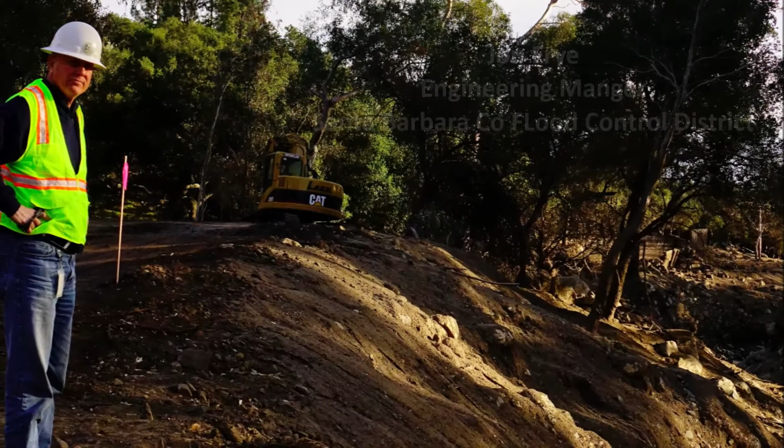Very good. So we've done a lot of these Zoom meetings, and every time I have to share my screen, it's kind of like a roller coaster ride, the fear and the trepidation, and is it going to work? And I have big thumbs. So everybody hold your breath. Well, you saw what happened to me. Oh, I think I've actually got this. Can you see it? Yes, absolutely. Okay, now I'm going to go to full screen. Okay, good.

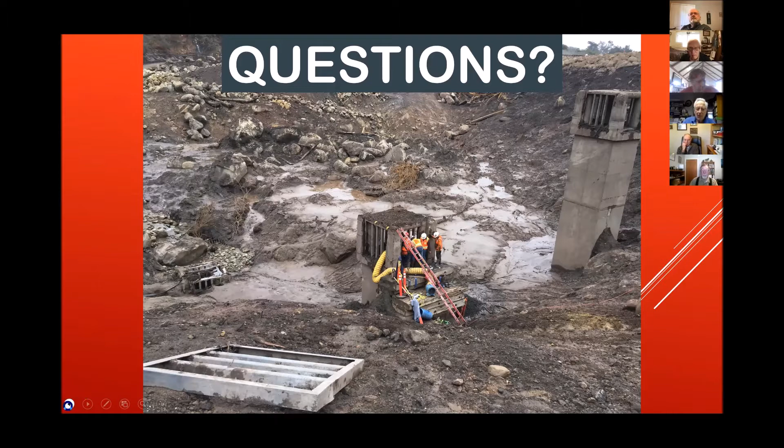So I see that I started off with the very last slide, and I'm going to do a really quick backtrack here. So here we are. I'm up front now, and again, thanks for inviting us. Let me get back to the full screen.

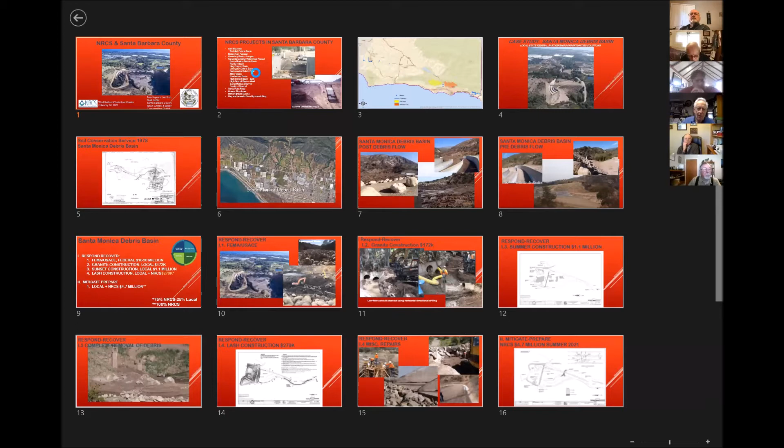Okay, so Bill, you had suggested you wanted us to go over just very briefly an inventory, if you will, of past SCS or NRCS projects. And right when you said that, a couple thoughts came to my mind. First of all, there are a lot of projects that we have partnered on over the decades, long even before I got here. But number two, it was the nudge that I needed, because it's actually been something in the back of my mind that I've wanted our mapping people to put together, a graphic inventory, if you will, because at Santa Barbara County Flood Control in the next couple of years, there's going to be a real turnover in senior level type people. And one thing we want to do is pass this institutional knowledge along. People are going to forget unless we make a conscious effort to take steps in that direction.

So this is a very... didn't have a whole lot of time to put this together, but this is a list of projects that a couple of us just off the top of our head put together. Goes back to the 70s for sure. And in fact, before I forget, so this Guerra Structures, that picture in 1975, that's original construction. Now in 1998, we had a big storm come through. Those structures suffered significant damage. NRCS came to town with an EWP project, repaired the structures.

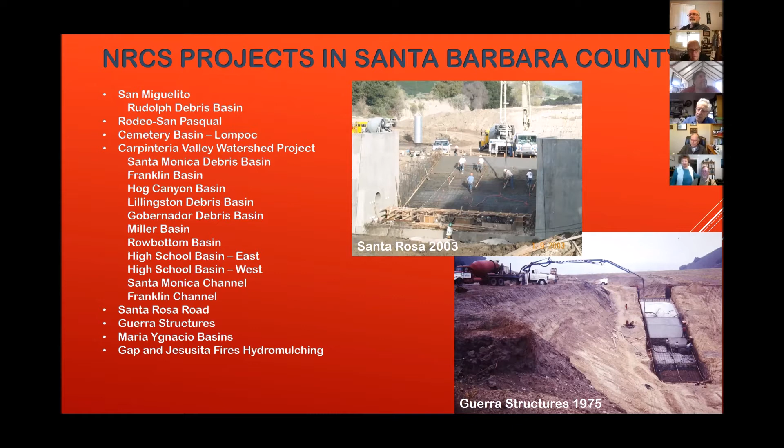Wow. A hydromulching effort, which itself is maybe worth a presentation all of its own. So a lot of history, a lot of strong work.

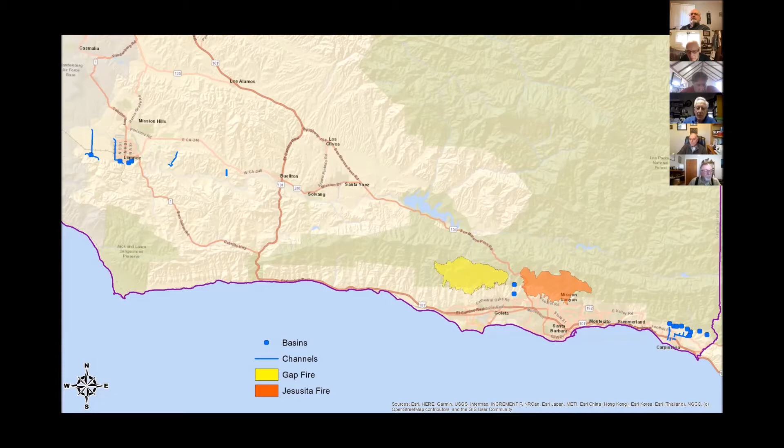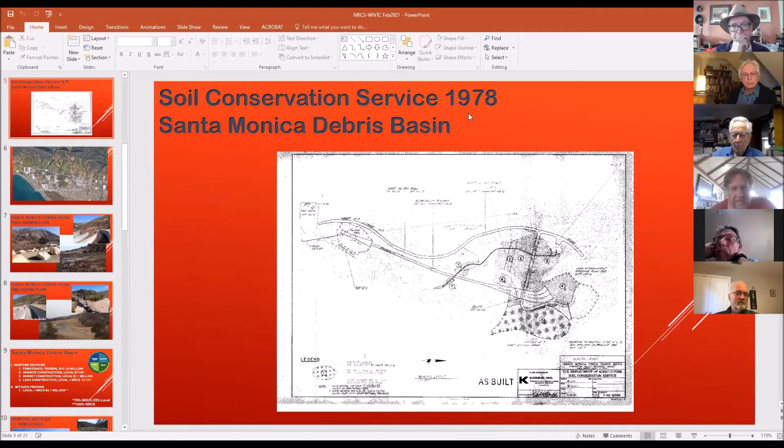So this picture here is just a slide of the record drawings. The basin, the dam embankment. This is the emergency spillway, which runs downhill, and then there's a plunge pool at the bottom of the emergency spillway. And this was all completed in the late 70s. And let me see here.

So the Santa Monica debris basin is located right here. It's actually part of the bigger Carpinteria Valley watershed project, which started in the 70s and wasn't really finished until the early 80s. So it was about 10 years from start to finish. The Santa Monica debris basin is really the crown jewel of that project, but it included several channels through the urbanized area also.

So for those of you who are not too familiar with what happened here in Santa Barbara County, about a month preceding that, we had the Thomas Fire, which at the time was the largest fire in California history. The Thomas Fire burned mostly in Ventura County, but it also burned a lot of the front country in Santa Barbara County. And the burn was pretty severe.

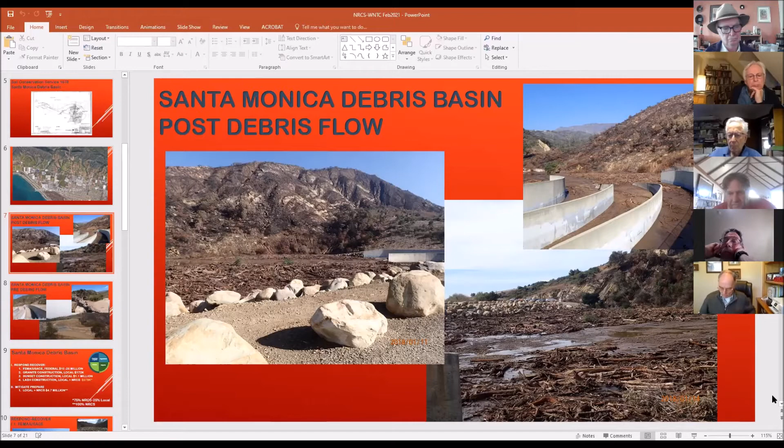But when we got out there on January 9th or 11th, Tower C was completely buried. That's because debris backed up from the emergency spillway and projected upwards at about 1.5%. So the projection of the debris buried all these towers. So it was a huge mess, but it worked. It worked. Yeah, you did the job.

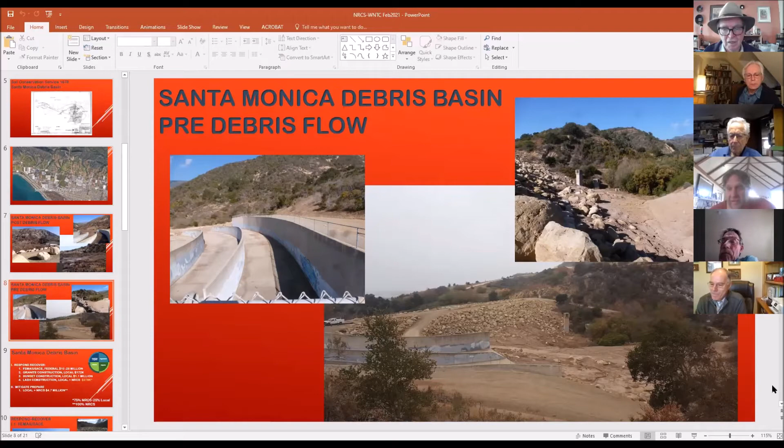So John put some slides here describing what the response entailed. For the initial response, we really relied on FEMA and the Corps to help us clean out this debris basin. John estimated here $10 to $20 million. I think the actual cost just to clean out this single debris basin was closer to 15 to $20 million.

I don't remember the exact volumes off the top of my head, but I want to say it was well over 100,000 cubic yards of material. There's no local disposal sites. It all had to be hauled to Santa Paula and to Buellton, maybe a 50 mile one-way trip. So the cost to clean out the basin was huge. In addition to the debris, we had several other cleanup efforts. I think they're detailed in further slides, so I'll wait for those.

But coming out of the project, the basin worked fantastically well, but there were some shortcomings as far as maintenance and operations, lessons learned. So we developed an operational improvements project. We've worked closely with the NRCS; Bill Ward helped us out with this also. We have now partnered with the NRCS on a $4.7 million operational improvement project for the basin. I'll talk a little bit about what that work entails and some of the shortcomings we're trying to improve.

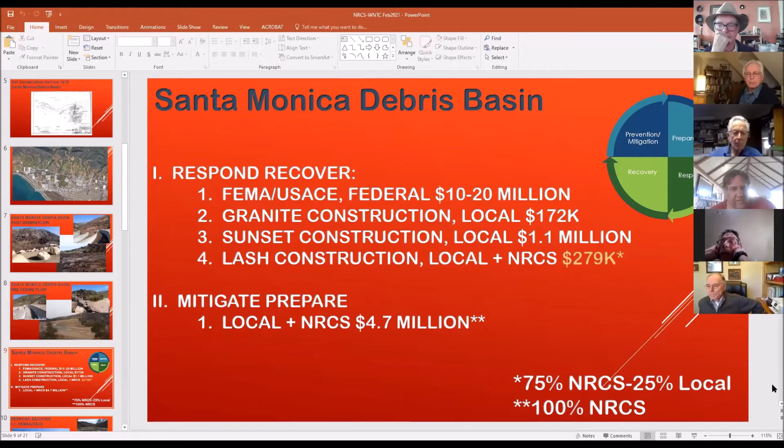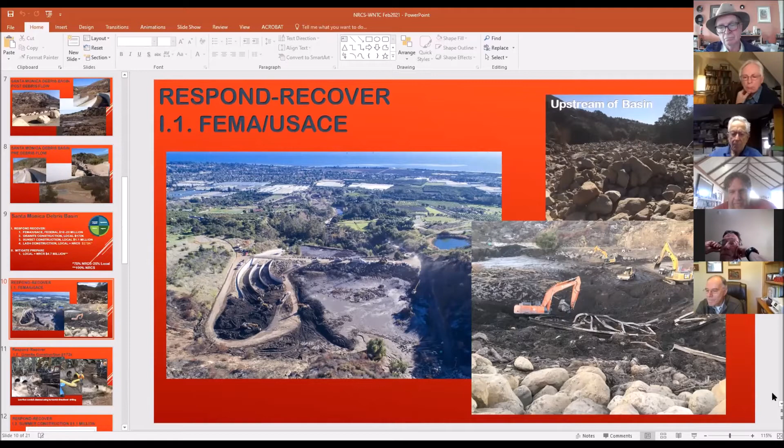One of the issues we had was the towers. They didn't necessarily initially clog. They did drain a little bit, but as we were mucking around trying to clean out the debris basin, a lot of the ash-laden sediment worked itself into the primary low-flow discharge pipe, and that ended up plugging the discharge pipe. That became an issue for us.

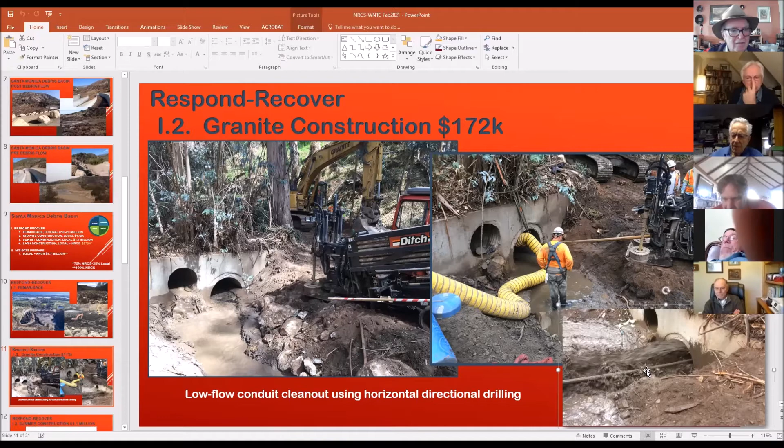And I think John has a video of that somewhere. I don't know if I can get it to work or not. Maybe, yeah, see if we can. I wouldn't worry about that if that's a challenge, so.

Once they got the plug to break open, this is what it looked like. Yeah, okay.

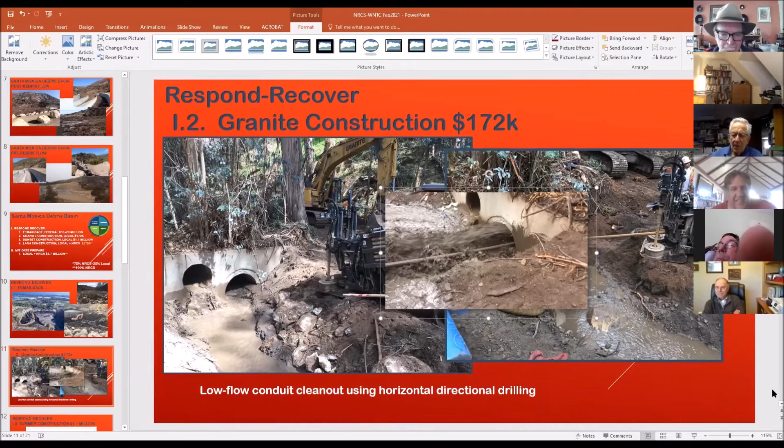Yeah, so it's funny, the Corps of Engineers came in, they used the record drawings, they estimated how much material was in the basin, and then they let out an emergency contract to excavate that much material from the basin. Unfortunately, we didn't have a lot of survey control of what was taken out. And so the contractor ended up taking material beyond the limits of the original line grade of the basin, leaving a lot of the rock at the bottom.

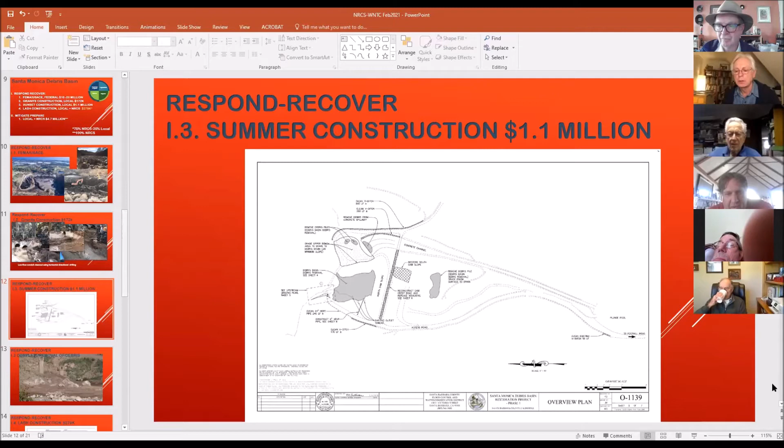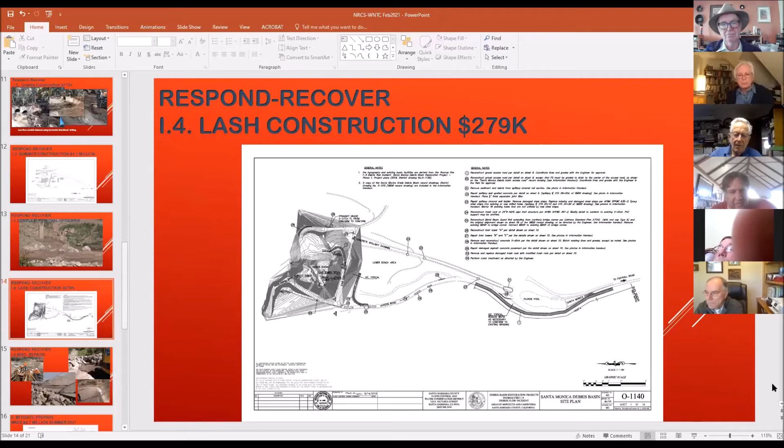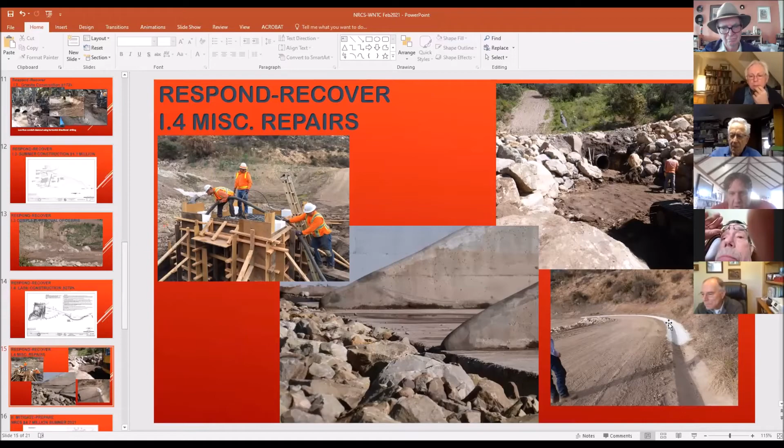And so we had a subsequent project after that, which ended up just repairing some of these. This is Tower A being reconstructed. We had to reconstruct some head walls and place some additional rock. Here in the lower right-hand corner, we had to reconstruct some V-ditch that was damaged.

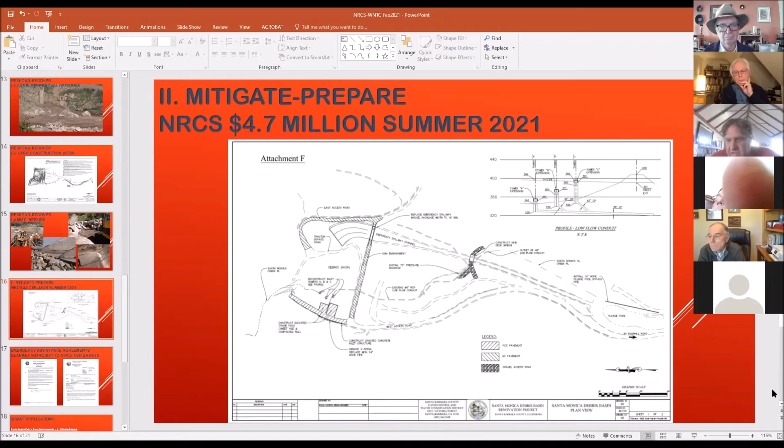And then these slides aren't very interesting. It just shows a lot of the paperwork and approvals for work. Let me see here. So yes, we did get emergency watershed protection money from the NRCS in the amount of $368,000 plus or minus, and that was mostly focused on the immediate repairs to the facility that were damaged. They were damaged both as part of the original debris flow, but they were also damaged from the cleanout too. It's just really impossible to avoid damaging the facilities. Right.

And then after that, we received the watershed flood prevention money in the amount of $4.7 million. Yeah, that sounds more like it. So that was awarded March 2020. Our plans are currently at about the 95% level, and we're still hoping to go to construction later this year. That'll probably extend into 2022.

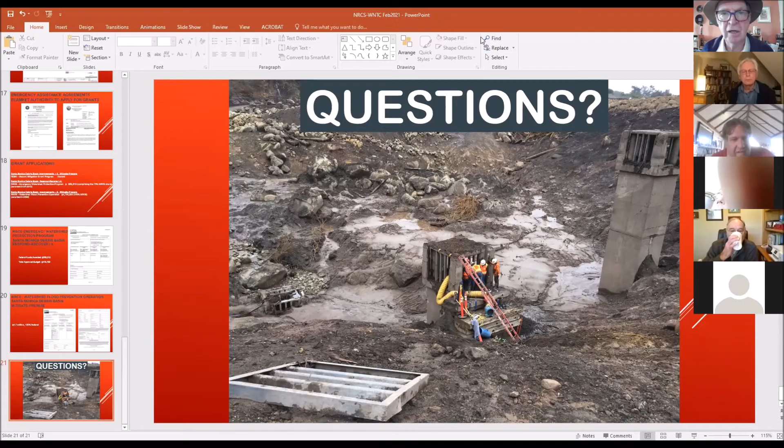That's great. Matt, if you're done with the pictures, you want to take the screen sharing down? Sure. Yes, that ended it there. Okay, go ahead and just end the screen sharing. That way everybody can see each other. So that was terrific. Really appreciate you showing the details of that.

And again, this project here, I actually have a YouTube video of it. And let's see, I think we might have time to show it. Let me see if I can do this myself. And Lee, in particular, you're going to enjoy this. I don't think you've seen it, but anyway, this is going to really show the devastation that occurred all around the area there. If you weren't right downstream of the basin, it's pretty amazing. So I've got that on email. I can send you the YouTube.

While we're watching this, Hugh, I'd also like to say how much fun it really was working with you guys, and it's so great to be able to go any place in the county and see projects that we did together. I mean, this is throughout Ventura County, and the good we did for the county. So that's one thing I'm very proud of. I think the design and construction is the most fun thing that an engineer can do. Oh, I agree, Hugh, 100%.